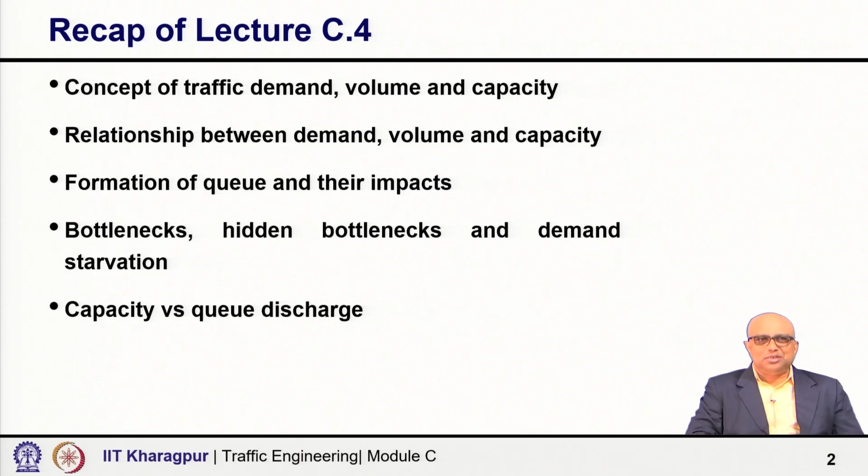One important thing I should mention: when I started our discussion in the last lecture about queuing analysis, I just started talking about queuing, but queuing analysis could actually be deterministic as well as stochastic. The example problem we took in the previous lecture was an example of deterministic queuing analysis. Why was it deterministic?

Because the vehicle arrival or demand was deterministic, it was a fixed demand. We said that for a given period of time, the demand is so many vehicles per hour, and it is fixed. Of course, another period of time the demand may be different, but that may be called the pattern of demand. For a given period of time, the demand is fixed, meaning there is no variation in the arrival rate during that time period. So it was constant or deterministic.

The service rate or capacity discharge was also deterministic or constant. Over a period of time, when there are three lanes or two lanes, the capacity values are different, but for a given time, for a given context, the value is constant and deterministic. Queue discipline was also an inbuilt assumption, that it was FIFO, first in first out. So the vehicle which is arriving first is getting discharged first, that is the simple thing.

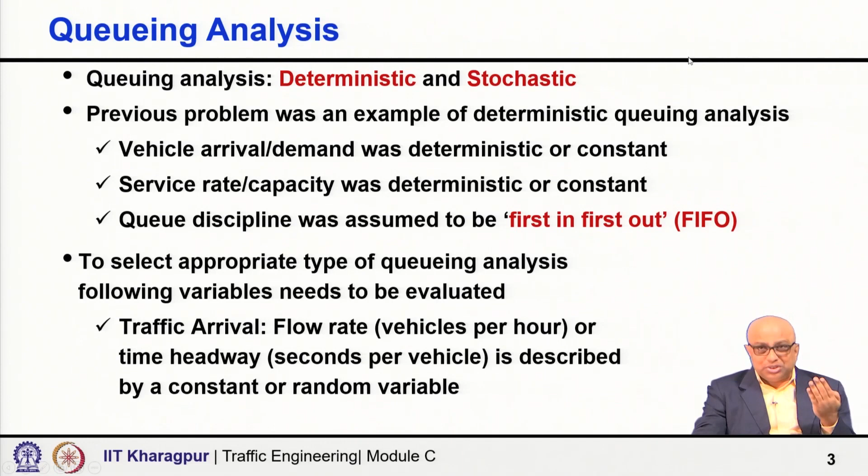So for traffic arrival, we need to check whether the flow rate or time headway is described by a constant or by a random variable. Similarly, whether the service or discharge, again flow rate or time headway, is constant or a random variable, and what kind of queue discipline is followed: first in first out, first in last out, served in random order, many things are possible.

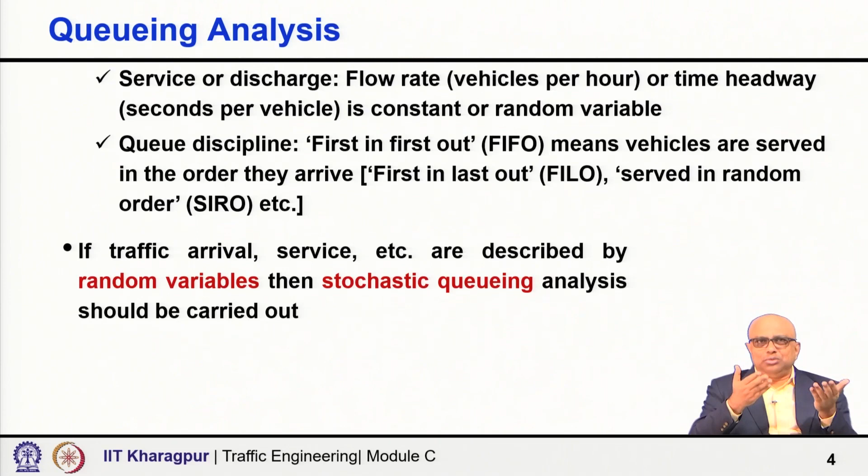So if the traffic arrival, service, etc. are described by random variables, then stochastic queuing analysis should be carried out. If not, the arrival rate is fixed at a constant value, the service rate is fixed at a constant value, does not change during a specified duration, and is not random in that sense, then we will carry out deterministic analysis.

With this background, let us relook at the deterministic analysis once again. Although we took some examples and discussed some basic concepts in the previous lecture, we shall build further on deterministic analysis. In deterministic analysis, the process assumes that all traffic characteristics of the queue are deterministic, with no randomness. So their outcome is not described by any distribution, it is a fixed value.

Such deterministic analysis is used under two scenarios. First, varying service rate that is not constant but varies, with different service rates during different periods. Again, it is not random, but different rates during different time periods.

An example will make this clear: constant demand, but the service rate is not the same throughout the period. During some period it is one value, during another period it is another. A simple example: when 3 lanes are operational, the service rate is something. If for half an hour one lane is blocked due to an accident, incident, or maintenance work, the service rate will be different during that period, and once that is removed, the service rate is restored to its original value. So it varies, but not randomly. When the 3 lanes are available, the service rate does not vary over time.

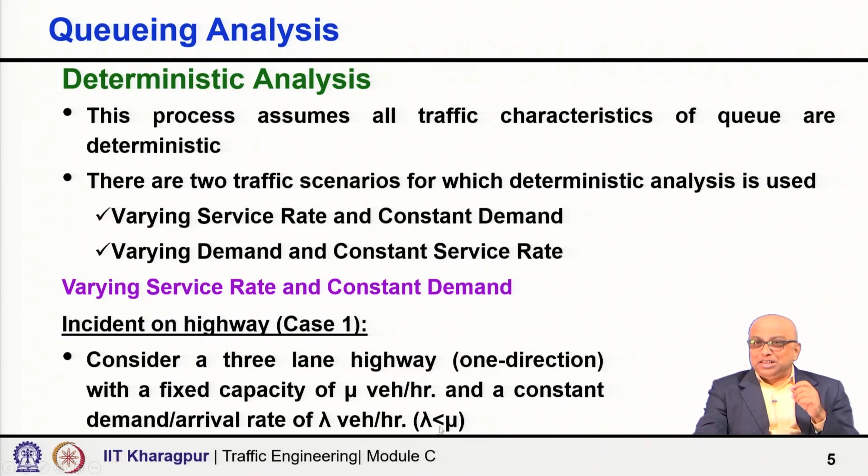The demand lambda is actually greater than mu r. Lambda was less than the original 3 lane capacity mu, but it is more than the 2 lane capacity when 1 lane is blocked. Before the incident there was no queue since demand was less than capacity, but after the incident, during this T hour period, the queue is formed.

So the maximum queue length is the excess demand rate multiplied by duration of the incident. What will be Q max? Q max equals lambda, the demand, minus mu r, the reduced capacity during the incident time of T hours. So Q max equals lambda minus mu r, into T.

What will be the average queue length? Half of this maximum. Now, what is the time duration of the queue? It is mu minus mu r, that is the reduced capacity, into T, divided by mu minus lambda. So how do we get the time duration of the queue?

Similarly, the total delay can easily be calculated as the time duration of the queue multiplied by the average queue length. So having calculated the time duration and the average queue length, you simply multiply these two to get the total delay. These values can easily be calculated.

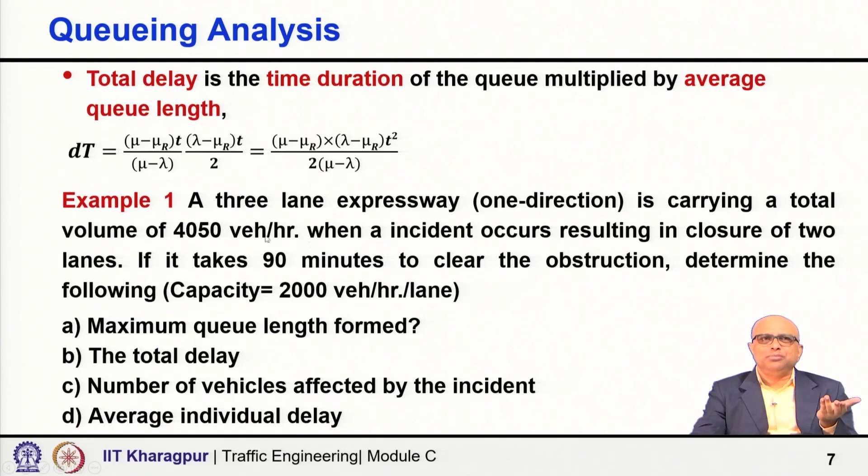Then the number of vehicles affected by the incident - because it takes 90 minutes to clear the obstruction, that's 4050 multiplied by 1.5. So all those vehicles got affected by the incident. What will be the average delay? You know the total delay is 6150, and you know the number of vehicles affected, so the average individual delay can be calculated.

Do not worry about the values, these are just example numbers. What we are trying to show is the calculation method, or how such kinds of things can be analyzed.

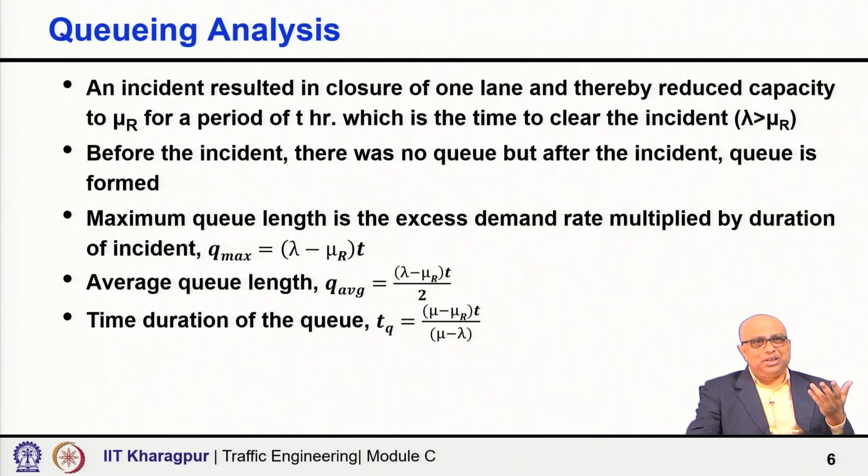Taking another case of a signalized intersection, let us consider arrival rate lambda, vehicles per hour, and service rate mu. Mu now has 2 states - we say varying service rate. The earlier case also had varying service rate, one during closure of 2 lanes and another under normal condition. Here also two service rates are considered: one when the signal is red, then 0, and the saturation flow rate when the signal is green.

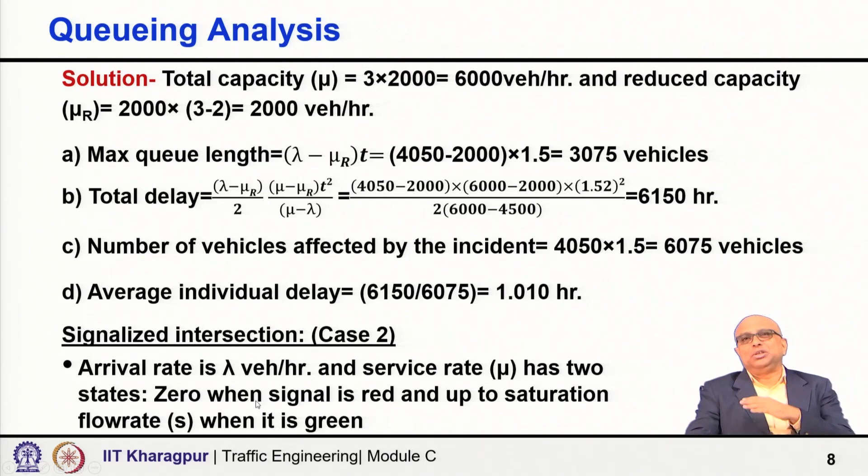So two distinct values, one during red, one during green. Now the queue assumes a first in first out system, FIFO. During the red phase, service rate is 0. When it is green, service rate is equal to the saturation flow s. Then again green is over, red comes, it is 0, again green goes, mu saturation flow rate comes down to 0, and like this.

How the cumulative vehicles and time may look like - this is an example with some assumptions. We are assuming that arrival is constant, a straight line with no variation - that is deterministic. Departure also follows a straight line, but when the signal is red, it is 0, so no discharge, no departure.

During green time, discharge occurs at saturation flow rate, catching up until these two lines meet together. With additional green time, whatever has arrived is all getting discharged. Then again red time, then during green time it catches the arrival curve again, and as vehicles arrive, they get discharged without any slowdown, delay, or even stop.

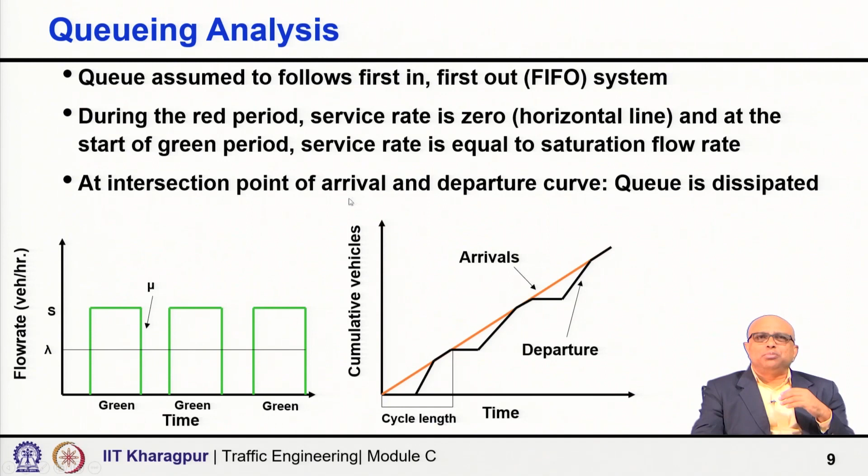So one assumption here is that there is no signal failure - meaning whatever queued vehicles exist during the red time in every individual cycle all get discharged during the immediate next green interval. So at the intersection point of arrival and departure, the queue is dissipated.

Now the time duration of the queue, Tq - what is it? If we take one cycle, it starts at the beginning of the red period and continues up to the point when the queue is dissipated, going up to the point where the cumulative arrival and cumulative departure lines catch up. That is the time duration of the queue.

So we can calculate it easily: lambda times Tq, the discharge arrival rate, equals mu, the departure rate, times Tq minus r, the time when there is no discharge. These must be equal, and you can get the value of Tq.

Then the percentage of time the queue is present can also be calculated - it is Tq time within a cycle length c. Sometimes these notations get distorted, but P Tq is the proportion or percentage of time the queue is present, present for Tq time over a cycle length c. So it's 100 times Tq divided by c, that much percentage.

Similarly you can calculate all other parameters - these are very simple, easy to understand: number of vehicles queued, number of vehicles per cycle, maximum queue length, average queue length while the queue is present, average queue length overall. All these can be calculated easily using this graph and simple, logical equations.

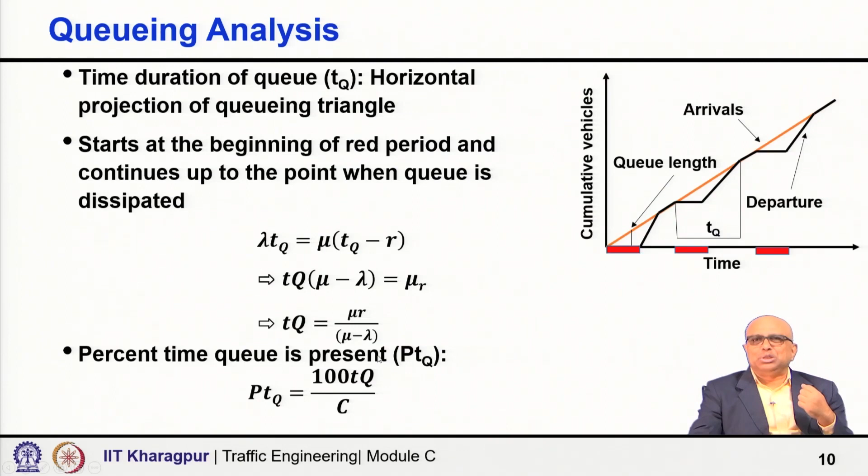Also the individual delay, average individual delay, all this can be expressed. I am not going to discuss each and every calculation, it is not necessary because they are quite simple and you can understand them easily.

Second case is the varying demand or arrival rate and constant service rate. The same procedure is valid in case the demand changes at a specific time and not gradually. Suppose service rate is constant over the entire time period, like in the previous case where a lane was blocked, but now we are not considering that kind of situation.

The discharge is constant, and the arrival rate gradually increases in the early portion of the peak period and then gradually decreases in the latter portion of the peak period.

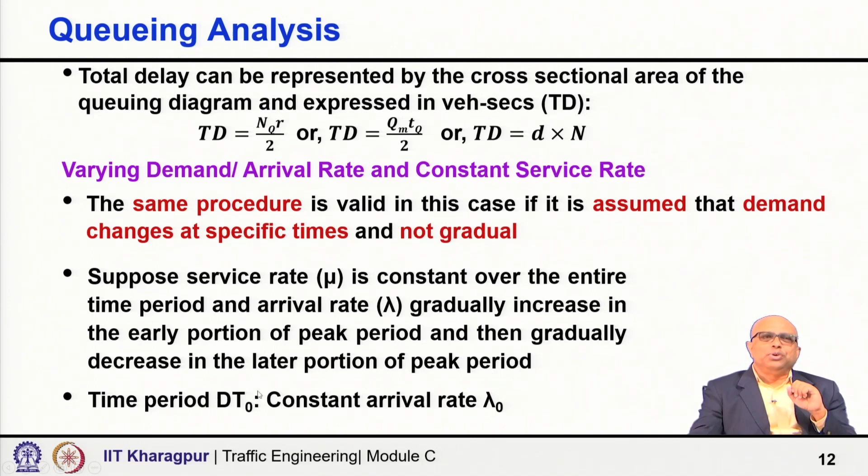If we consider time period dt0, the constant arrival rate is lambda 0. During time dt0, the constant rate of flow, this is the demand. Then during time dt1 the demand goes from lambda 0 to lambda 2, then over the next period it remains the same at lambda 2, then further reduces, during time dt3, to lambda 4. In between, somewhere while it is increasing, it crosses the capacity value or maximum service rate value, and while coming down also, at some point it crosses that value.

So during time period dt1, arrival rate increases from lambda 0 to lambda 2. Some time during this period the arrival rate exceeds the service rate, here you can see that point. Then during time period dt2, constant arrival rate lambda 2; time period dt3, linear decrease from lambda 2 to lambda 4. Sometime during this period the arrival rate becomes less than the service rate, say at this point, and beyond dt3 the demand remains constant as lambda 4.

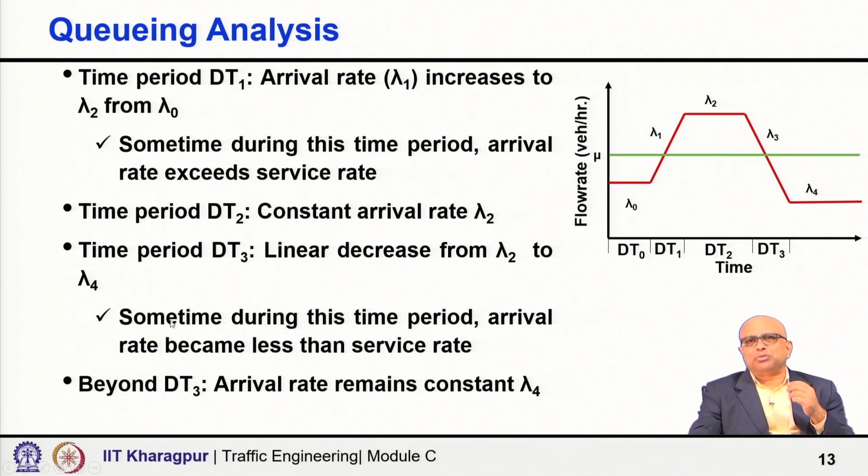If it is so, then we can easily calculate the time when arrival rate exceeds service rate. We can assume a linear variation - simple - at this time it was this, at this time it is lambda 2. So with a linear variation you can easily calculate it: the time when it exceeds the service rate from the start time, and again the time when arrival rate becomes less than the service rate, after the end of this Tm period.

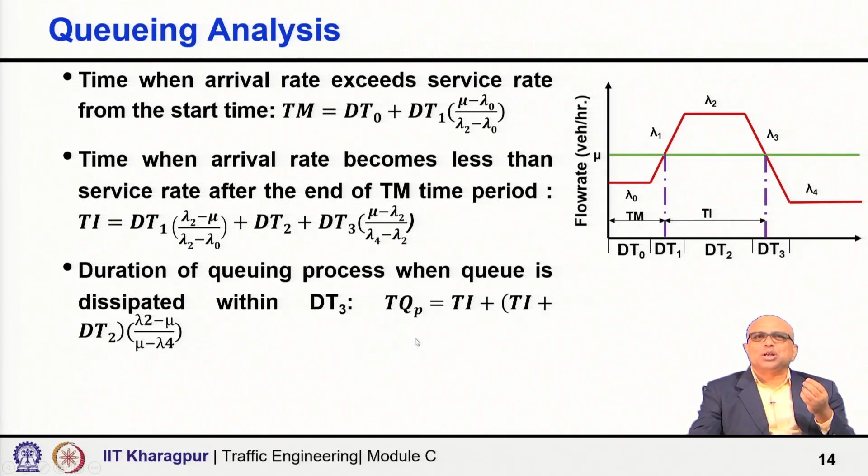From the Tm period, how much time it will take - that Ti - can also be calculated easily, and then the duration of the queuing process when the queue is dissipated. Now this queue may be dissipated within this period theoretically, when it is coming down and by the time it is reaching the demand level lambda 4. So within this DT3 time, DT3 time itself, the queue may get dissipated. If so, then the duration of the queuing process can be calculated using this formula.

If not - if the duration of the queuing process when the queue is dissipated after the DT3 period depends on the value and the difference in the rates, and how much time it will take. It may get dissipated completely within this DT3 period itself, or it may go even beyond that. If it is going beyond that, then the calculation will look different.

Now the number of vehicles adversely affected by the bottleneck you can again calculate - TQ into mu, total delay in vehicle-hours, maximum number of vehicles in the queue - all are simple calculations. You can calculate these easily, no problem.

And this is the deterministic case, so all the calculations are very simple. We can take the area, assume linear variation, assume a simple triangle, and find out the area - such kind of calculations are involved. So everything you can understand very easily. The maximum number of vehicles in the queue, all you can do.

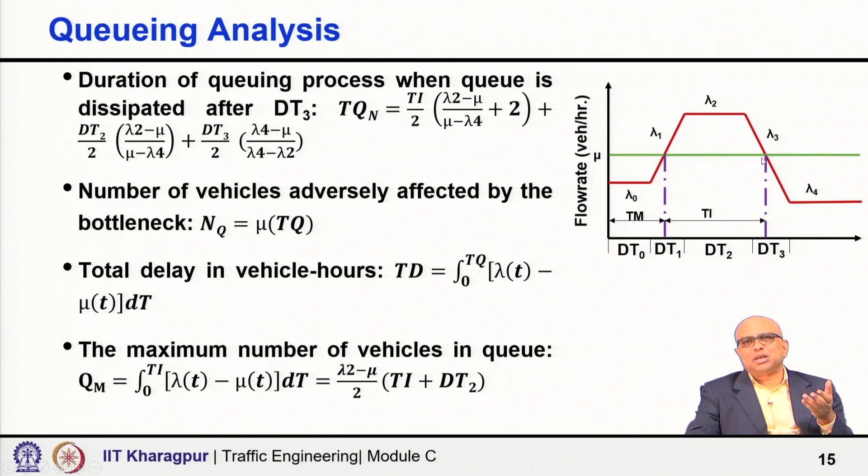When will the maximum queue be there? This will be there during the 0 to Ti period. This is the Ti period, when it is crossing and when again coming down it is touching the capacity value. So during that period is the Ti. Now let us take an example to explain this further.

So you can use some kind of formulas, similar to the formulas I have explained in the previous two or three slides.

We will also try to show how the value for this example problem can be calculated. I have not used the formulas directly, but you can use them to get the same result, same thing.

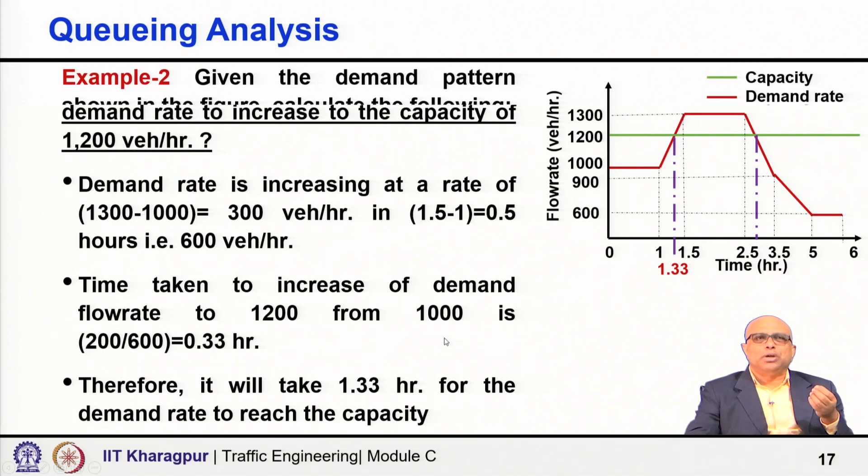How long does it take the demand rate to increase to the capacity of 1200 vehicles per hour? Let's take it one by one. The demand rate is increasing from 1000 to 1300, that's 300 vehicles per hour increase happening between 1 and 1.5 hours, so in 0.5 hour that rate is happening. So the actual rate is 600 vehicles per hour, that is the rate it is increasing.

So the time taken to increase the demand flow rate to 1200 would be how much? From 1000 to 1200 is a 200 increase, and in 1 hour a 600 increase is happening, that is the rate. So a 200 increase will happen in 0.33 hour. Therefore it will take 1 hour plus 0.33 hour.

So 1.33 hour for the demand rate to reach capacity. The second part: how long does it take the demand rate to decrease back to the capacity of 1200 vehicles per hour at this point? That is what we want to find out. Demand rate is decreasing at what rate? From 1300 to 900 in 2.5 to 3.5, so in 1 hour, 400 decrease in 1 hour.

So from 1300 to 1200 means how much decrease? It is only 100 decrease. So demand is decreasing from 1300 to 900, that's a 400 decrease in 1 hour, so a 100 decrease happens in how much time? 0.25 hour. So how much time will it take?

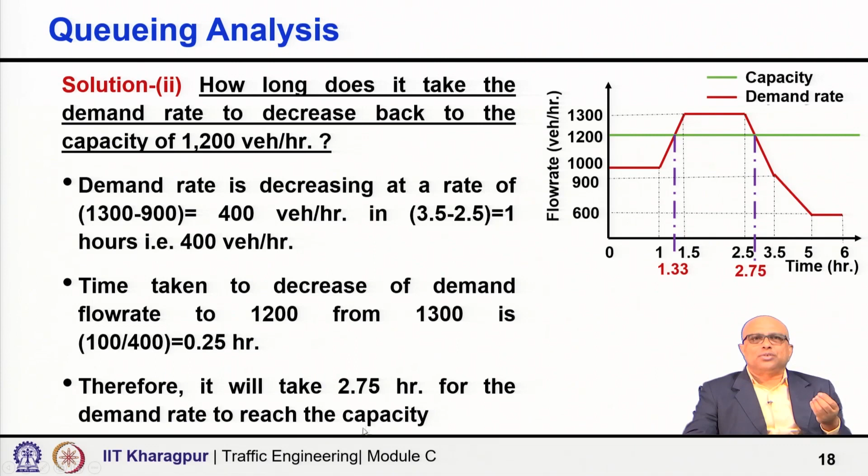Third, what is the size of the queue developing during the period when demand was greater than capacity? What you can do is calculate the area of the demand and capacity curves when demand was greater than capacity, basically the area of this trapezoid. So 0.5 into this is 2.75 minus 1.33, and this one is 2.5 minus 1.5, that is AB. So 0.5 of this plus this, into the difference which is 1300 to 1200, so it is only 100 difference.

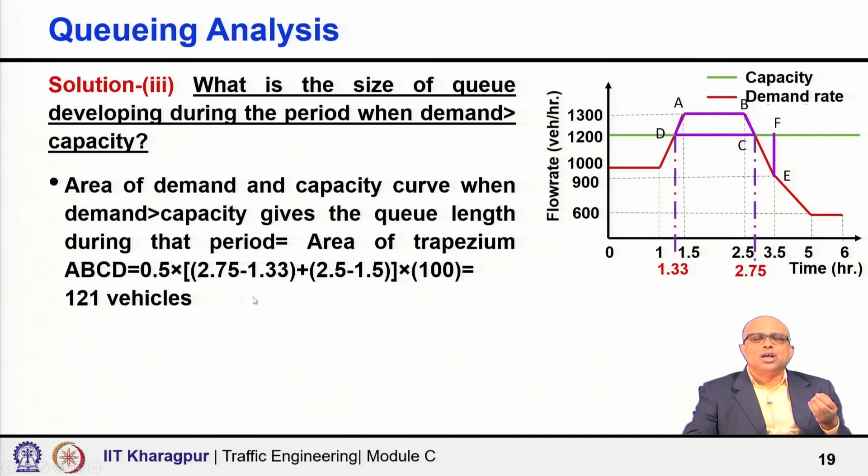So 121 vehicles. Similarly, how much time will it take to dissipate the queue? The queue is dissipated at t hour from the start. If the queue is dissipated at T hour from the start, how much time will it take?

Assume that the time to dissipate the queue is between 2.75 and 3.5. That means within this period, from 2.5 to 2.75, when it is just below 1200 or just touching 1200, down to 900 during this period, so 2.75 to 3.5 hours within that, and in that case the area of the triangle is how much?

How much total Q? 121. How did we get 121? We calculated it earlier. We know that 121 vehicles will be in the queue. So how much time will it take?

121, and again if you take this area, it is also equivalent to this area. So that will be 0.5 into t minus 2.75, that is the base, this or this one, and into 1200 minus 900, that is the area of this triangle. So equal to 121, and you can get t equal to 3.556.

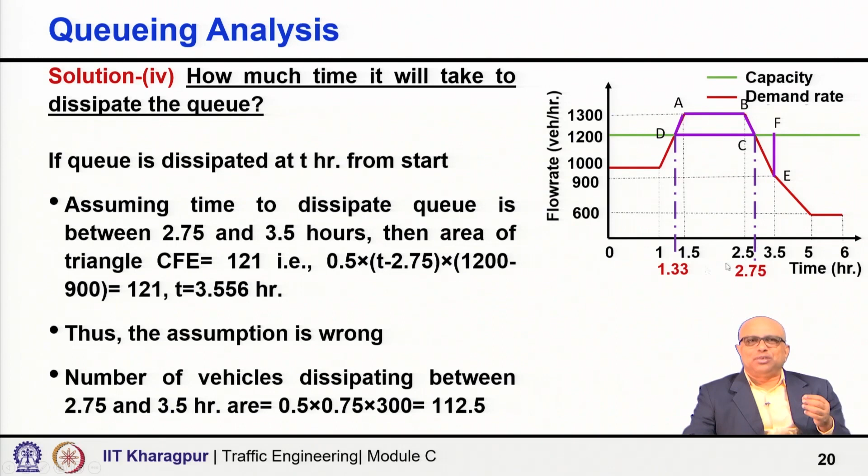In this case the whole area is taken. So we know 112.5 vehicles can be cleared, dissipated up to time 3.5, and whatever will be remaining is 8.5 vehicles, and this may be cleared obviously within a short time after 3.5 hour.

And what will be this? Again you take that area and assume the time t, and you can find out it is 0.47 hour. So it is 3.528 or 0.47 hours.

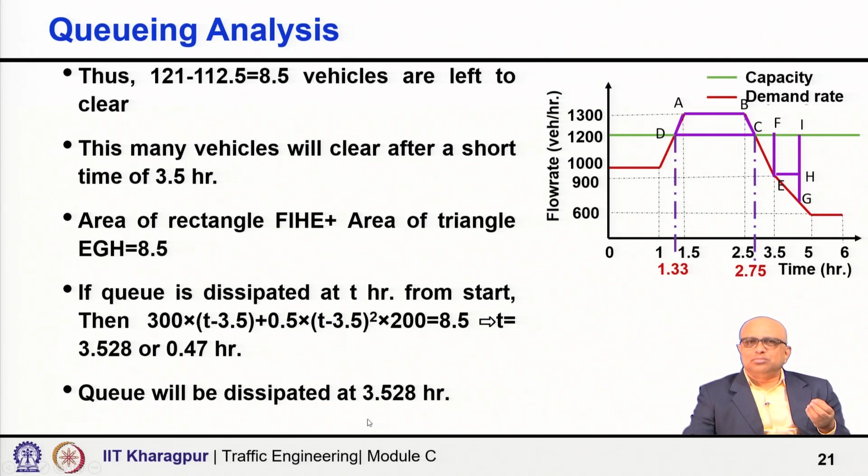So you can take that value, and accordingly you can say that when the queue will be dissipated, it will be 3.528 hour. Now coming to the next part, the stochastic analysis. This assumes that the variables are random, and therefore the queuing process is not deterministic.

Now, when a queue is formed, it is formed because the arrivals wait for a service or an opportunity. Example could be arrival of an accepted gap in the main traffic stream. A vehicle is trying to do a maneuver, so looking for an acceptable gap, not every gap is acceptable. So looking for a gap, or collection of toll at a toll booth, or maybe parking fee at the parking garage. Vehicle is coming out of parking lot and trying to pay the fee.

Remember that in all these cases, the realistic assumption would be that they follow or are described by a random variable. Why? Because not every vehicle will take the same time to pay the toll or the parking charge, and not every gap will be accepted. So such an acceptable gap may not come at every equal interval. That is the process, so a stochastic analysis is more useful and more practical under such scenarios.

So proper analysis of the effect of a queue needs the following characteristics to be known. Nature of arrival distribution, how the vehicles are arriving. You can think of a counting distribution or the corresponding headway distribution.

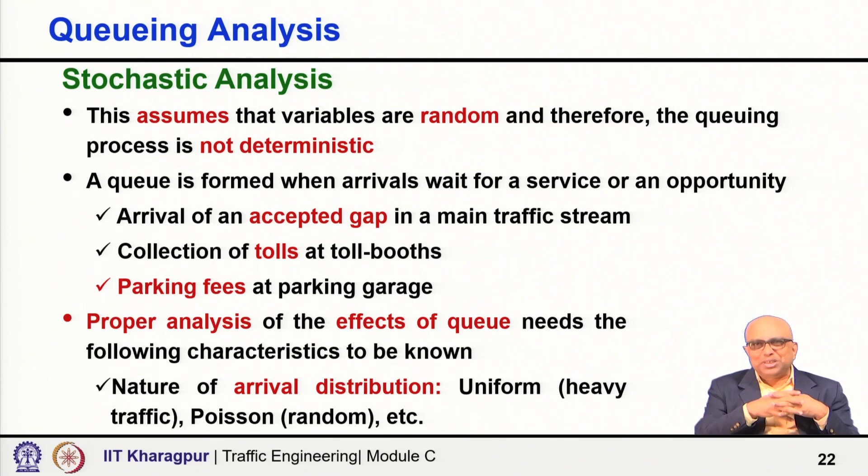In stochastic analysis, we assume these are not fixed, single values like in deterministic analysis, but follow a distribution. So it is a random variable which follows a distribution. The outcome, anything we want to calculate as we did earlier, we can calculate here also - the expected value, the maximum queue length, the probability - all will be expressed in terms of probability.

So we can calculate all the parameters. For example, if you assume single channel, undersaturated and infinite queues, with Poisson arrival and negative exponential service time under undersaturated conditions, then all these values can be calculated. Obviously, since it is a stochastic process with random variables following certain distributions, it will depend on what distribution you are assuming. But you can calculate things like probability of n units in a system.

What will be the probability? The outcome will obviously be expressed in terms of probability, because we are talking about a random variable following a particular distribution. Similarly, you can calculate expected number of units in the system, expected number of units waiting to be served - all this you can calculate. Obviously, if you change the distributional assumption, you may come out with a different equation.

Let us take an example. On a given day, 425 vehicles per hour arrive at a toll booth located at the end of an off-ramp of an expressway. If the vehicles can be serviced by a single channel only at a rate of 625 vehicles per hour, determine the percentage of time the operator of the toll booth will be free.

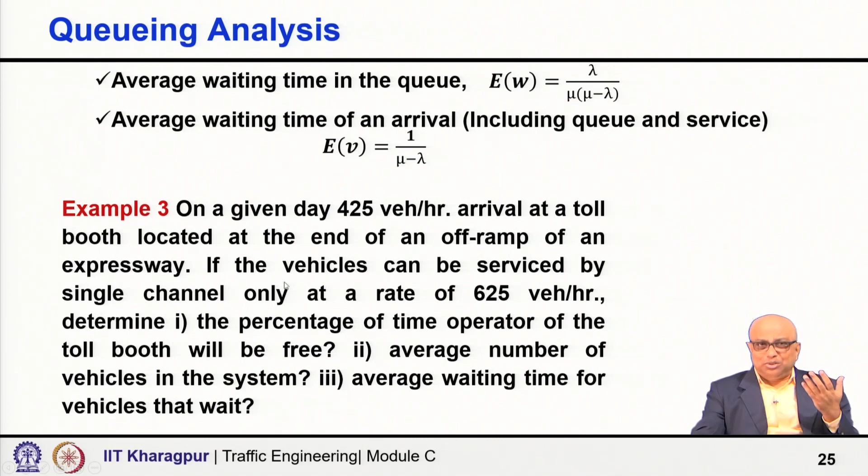Average waiting time for the vehicle, EV, you can calculate here - average waiting time for an arrival including queue and service. So all these calculations you can do. Now remember, the actual calculation of probability, expected value, expected number - all these will change based on what distribution you are assuming, but you can calculate it, and the outcome will generally be in terms of probability. As I've said, what is the probability that there will be 0 vehicles during an interval - that you can calculate, and then say maybe 32% of the time the operator will be free.

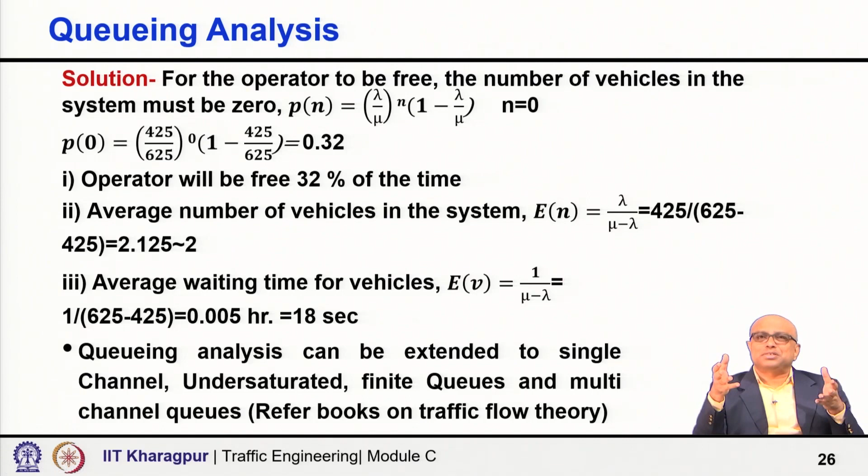So what we discussed here can be extended further to single channel undersaturated finite queues, and multi-channel cases - so many combinations and possibilities exist, but I will not extend further in this class. If you are interested, you can refer to any book on traffic flow theory where you will find many further developments, and you can access that material.

So what we discussed here about queuing analysis - I mentioned that queuing analysis could be deterministic or stochastic, and explained clearly when it is each. Then how deterministic queuing analysis can be done under two scenarios: varying service rate with constant arrival rate, and varying arrival rate with constant service rate - I explained this with examples, and also gave an introduction to stochastic queuing analysis, explaining with certain distributional assumptions how you can calculate the various parameters of interest.